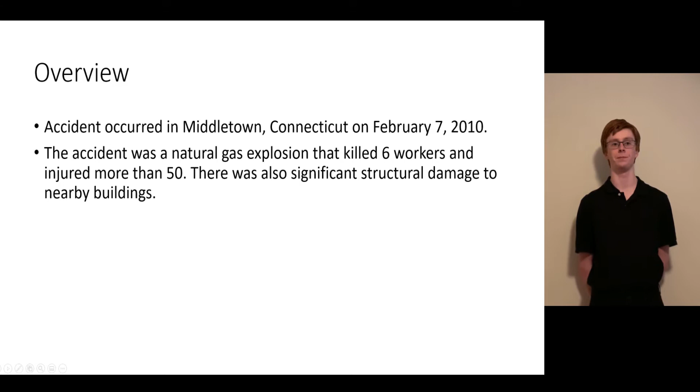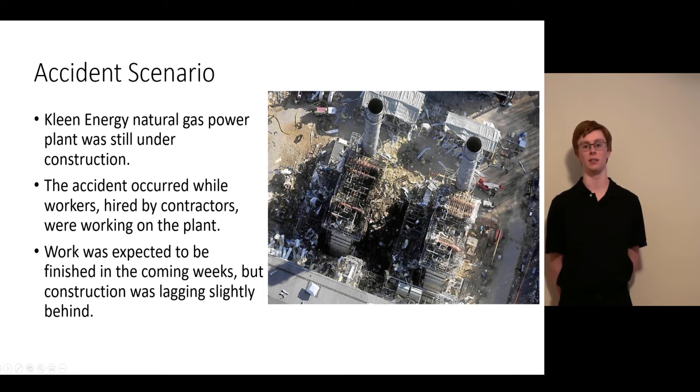So the accident scenario: the Kleen Energy natural gas power plant was being constructed in Connecticut. When the accident occurred, there were contractors and workers working on the plant, and they had just finished building a certain segment of piping. Work was expected to be finished on the entire plant in the coming weeks, but construction was lagging slightly behind. Before the accident occurred, there was debris in pipes that had recently been installed that needed to be cleared in order to prevent any turbine damage from possibly occurring.

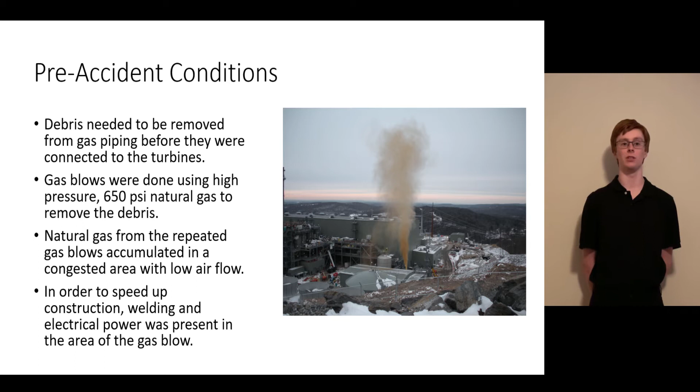This was fixed by doing gas blows using high-pressured natural gas at around 650 psi to remove the debris. The natural gas was used in 14 different blows in the past weeks before the accident occurred, but this morning the natural gas accumulated in a congested area with low airflow. In order to speed up construction on the building, there was also welding going on in nearby buildings, as well as electrical power was present in the area of the gas blow.

So the events that precipitated the accident: in the 10 minutes prior to the explosion, there were 480,000 cubic feet of natural gas that were released in an area that was not very well ventilated. The natural gas, mixing with the oxygen in the air, reached flammable levels, and an ignition source was soon found, leading to a large explosion. The resulting pressure wave damaged nearby buildings and injured more than 50 workers, and 6 of the workers later died from the injuries.

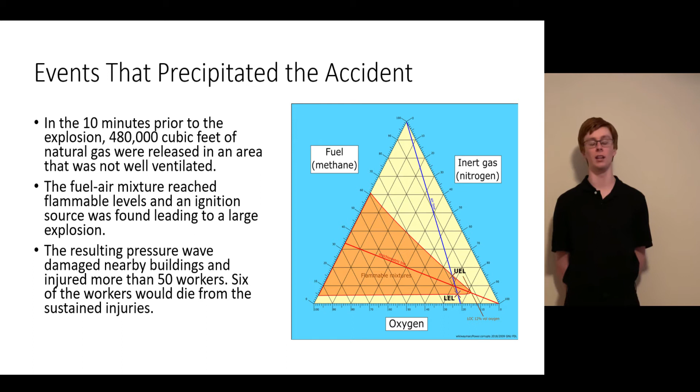As you can see on this slide showing the flammability diagram of methane, the lower flammability limit and the upper flammability limit is a tight range when oxygen from the air is used, but with 480,000 cubic feet being released into a small area, it's understandable how it reached an explosive level.

So what were the causes of the accident? There are a couple design problems of the plant itself. Although it was still being built, the power plant was designed to use a combined cycle power system. This means that the gas that comes in turns one turbine before it's burned to heat water into steam to then turn another turbine. This means that to account for the pressure drop in the first turbine, the gas that's used has to be at a very high pressure. The exit of the gas blow additionally was in a congested area between 2 buildings with little airflow.

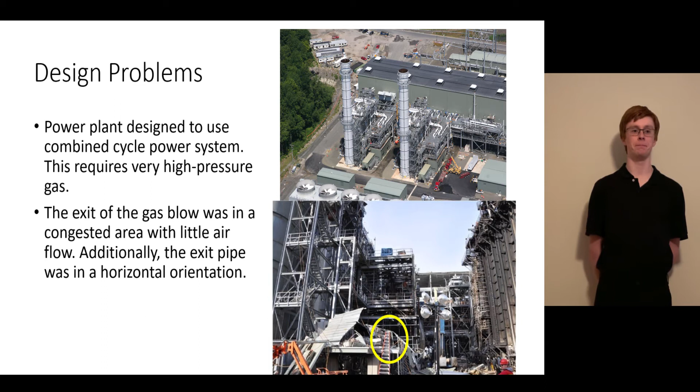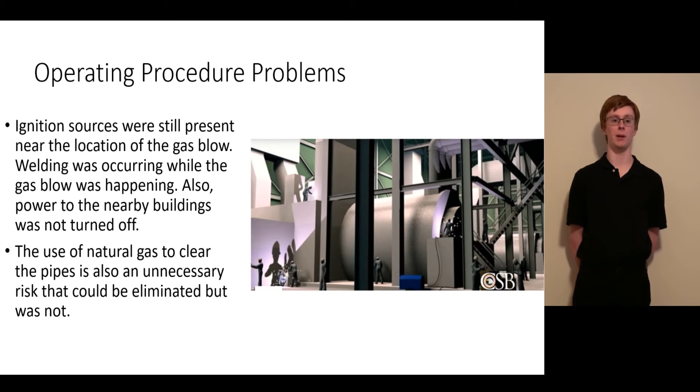The operating procedure issues. The ignition sources were still present in the area around the gas blow. Welding was occurring while the gas blow was happening. Also, power to nearby buildings was not turned off, meaning that an electrical spark could occur from a loose wire. The use of natural gas to clear the pipes is also an unnecessary risk that could be eliminated, but was not. There were quite a few problems with the management as well.

The accepted industry procedure was disregarded by management in order to save time and money. There was also poor communication from management, and some of the workers present that day at the plant were unaware that the blow would be occurring. Training was also inadequate for employees working specifically on the gas blow, and there was not proper notification to employees, but also reaffirmation of the training the day of the gas blow as industry procedures recommend.

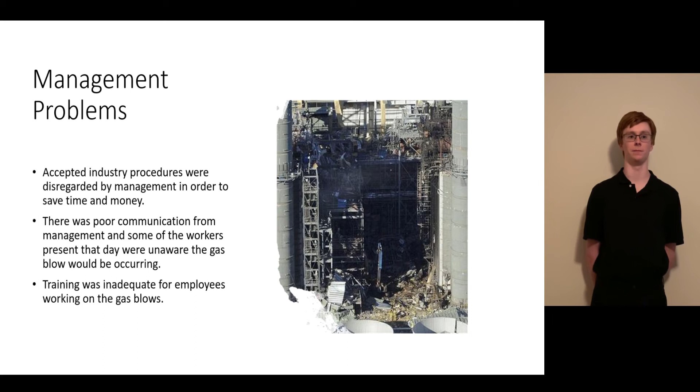So what are the recommendations for prevention and mitigation of this kind of accident? The immediate technical recommendation is to change the location of the gas exit to a better ventilated area so that the gas will disperse. This can be done in multiple ways. Some people will add temporary piping so that the exit of the pipe is not where it would normally be, but it is in a better ventilated area.

Additionally, when the blow is occurring, there should be as few personnel as possible in nearby buildings, but also near the gas blow. And there should never be any kind of hot work, such as welding, going on nearby where the gas may reach. And also power should be turned off to nearby buildings to prevent any sparks from occurring. Also, by having the exit in an open area, any debris that's inside will not strike metal, which is another way that the ignition can occur.

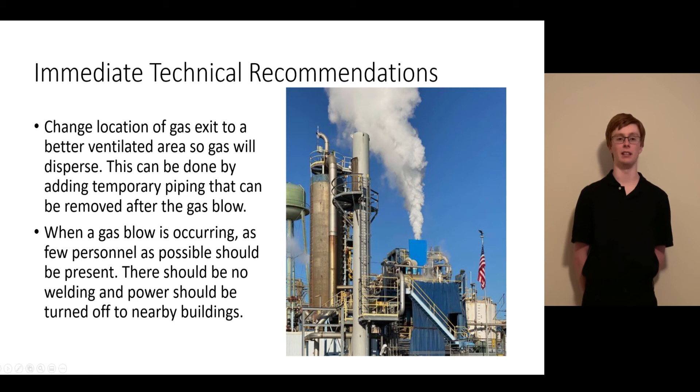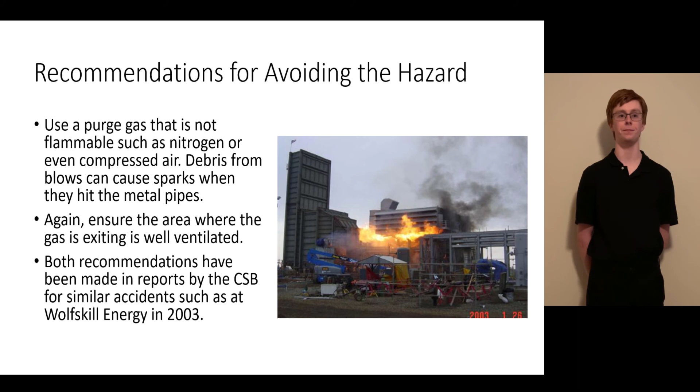Additionally, this is important, as I said before, because debris, when it's exiting the pipe, if it hits metal, it can cause sparks, or if it's hitting the inside of the pipe as it is being blown out. Again, ensure the area where the gas is exiting is well ventilated, but these recommendations have been made before, which means that they were ignored when this accident occurred. There was a similar accident at Wolfskill Energy in 2003 where they did a natural gas blow and the gas ignited.

So recommendations for improving management. The biggest thing is to start audits by third parties that are not involved. Obviously, the management knew the industry standards. This accident was not the first time that they had occurred, but their operating procedures were still putting workers at risk and risking an explosion. This third party will make sure not only that the operating procedures are safe, but then during construction, the audit will check to make sure that the procedures are being followed.

Another way to improve management is to ensure that every worker present at the gas blow is trained specifically for that job, and that safety tips are reinforced to all workers before the blow begins. This did not happen, and so even if they did have training, it's easy to forget some small tips here and there, and that's important to be reinforced.

Additionally, they need to make sure that worker safety is put above profits. This goes beyond this accident specifically and extends to company culture. By them putting profits first and having welding going on, obvious ignition sources, and ignoring industry procedures, this isn't just a one-time thing. If they're willing to do it now, they're willing to do it again. So management needs to put worker safety first.